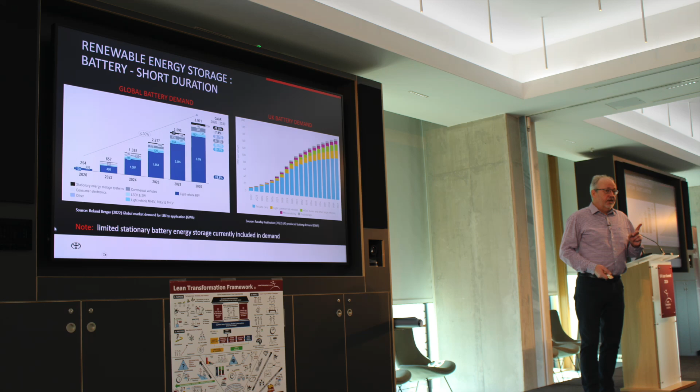So I'm Jon Hunt, and I'd like to thank you very much for the opportunity to come and speak to you all today. As was explained, I work for Toyota. I'm probably what you'd call a veteran of Toyota, I've managed to stay there some 30 years, and in that time I've seen quite a lot. I work on the fluffy side, in sales and marketing, unlike my colleagues who make the stuff. But guess what? You need us to sell that stuff. So it's about collaboration and cooperation.

I'm going to give you a bit of background to what I've learned and what I've seen in terms of lean product problem solving over those years. A little bit different from the academic things we might have heard today, and perhaps some resonant things about what we're all experiencing in environment and other areas.

So here we are, we're problem solvers, aren't we? We're trying to get to that silver bullet. I'm perhaps a bit overawed by the people in the room, the things people have done, what we've learned about how they've managed to achieve and progress things. This is a room full of practitioners of problem solving. And that's one of the innate human things we all have, the very unique thing that humans have in the animal kingdom. We can think of things in the future, modify the environment we're in, and take action to address that.

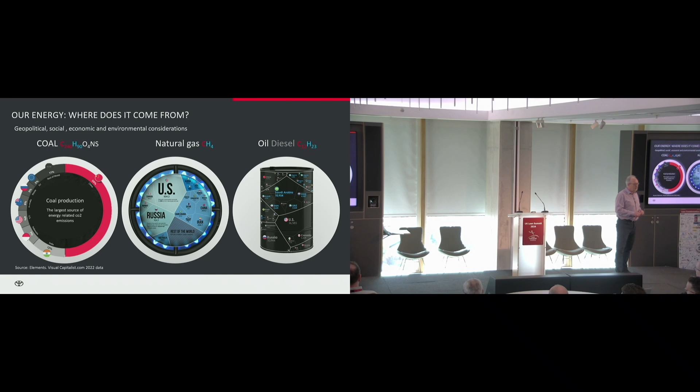The problem, of course, if you have a little closer look at that chemical formula, is that the energy that we use is all bound up with a lot of polluting, toxic, dangerous, and altogether unpleasant other molecules and elements. The carbon that causes the issues that we have. So this is a huge issue.

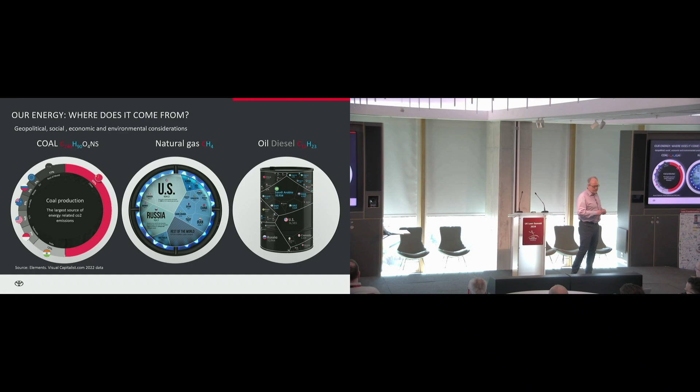So how do we overcome it? Well, it's not going to be easy, because when we look at energy, over 70% of the energy that we use on Earth today is based around those fossil fuels. So weaning ourselves off it is going to be extremely difficult. So we have to take different measures in order to get new energy, or somehow clean up this energy, get rid of some of that pollutant that's in our energy that we currently take for granted.

And again, this is fantastic, because our hydrogen-powered star provides us with the opportunity to take energy and turn it into something which is clean and completely renewable. Because, of course, the sun creates our weather patterns. Our weather patterns produce wind, and that, in fact, through its effect of warming the sea, creates our currents. And those currents provide us with the power that we can also harness as well.

And it's inexhaustible. There's more energy lands on Earth every day to run the Earth for more than a year. The problem, of course, is this energy tends to be in places which are remote and difficult to get to. So the best wind is in the middle of the sea, the top of a mountain. The best solar perhaps in the middle of the desert, far, far from the places of consumption.

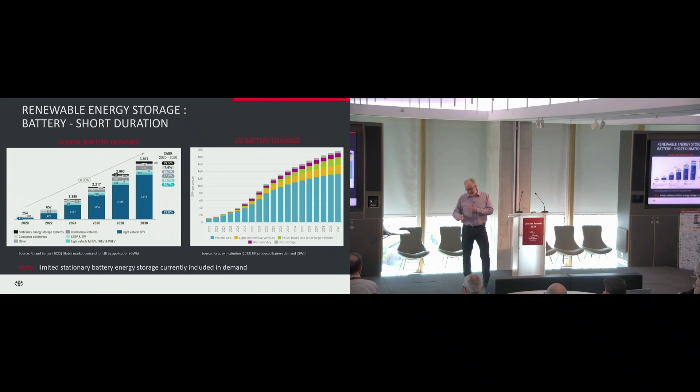What they say, Benchmark Mineral Intelligence, who produces some of the world's best insight into materials for batteries and raw materials, is that what we require in order to fulfill those battery requirements purely for transport is about $360 billion and about 360 new mines.

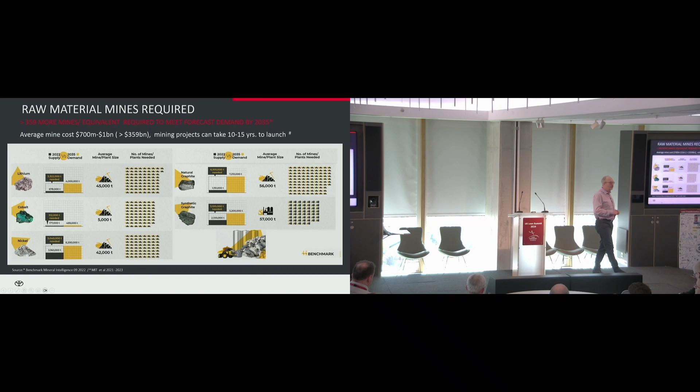However, they also point out that if you were to know where these materials were and you were able to start your mine, dig it up, and go through your processes, it will take between 10 and 15 years. We're in 2024 now, and by 2035, when the UK and many other countries will ban combustion vehicles, we're expected to have produced that many batteries.

There's a bit of a gap in terms of where you think the production of batteries may be. And that's actually understood. So despite all the things that are talked about, it's very well understood. The other question we've got to consider is where and how battery production is done, who controls it, and will it be available to us all.

These tables really just show you the current situation. This is battery production, this graph here. Draw your attention to the red block, this is battery production in China. Great, China produces a lot of batteries. They have a lot of demand themselves. Are those batteries really going to be made available at a price that's achievable and affordable for the rest of us to do the things that we want?

We don't know yet. If you look at the far side, this is actually looking at the material production side, and who controls what - the minerals and also the production capabilities. And China dominates it entirely.

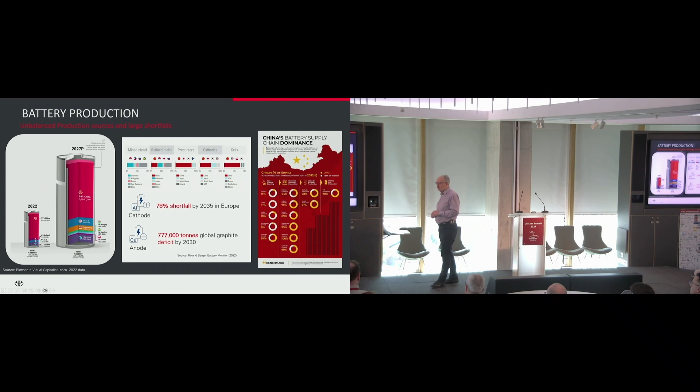When we look at all the materials and minerals, it's already identified that for Europe alone, we've got, by 2035, a 78% shortfall in the cathode materials. We've got 777,000 tonnes of graphite shortfall by 2030 globally. So there's a huge gap in terms of raw materials and the batteries we apparently require.

When we look at costs, we should understand how costs are made up. Over 50% of the cost of a battery is raw materials. If you are rushing to get those raw materials and they're in short supply, it's unlikely the price is going to go down. So the only place you can play around with in terms of cost is the manufacturing process, and perhaps by making your processes very lean you can reduce costs somewhat, but there isn't an awful lot of fat in the system to take out.

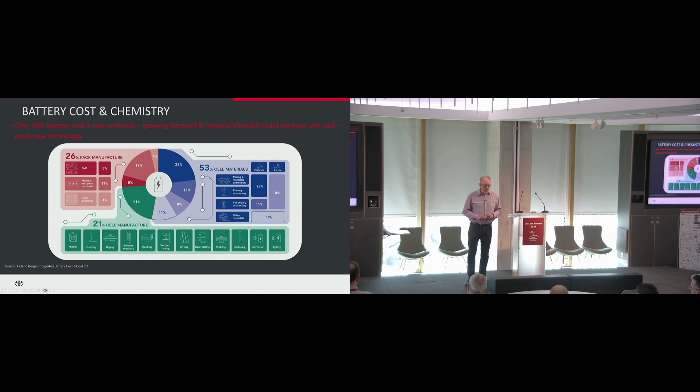So how might you address it? Well, there have been people thinking about these problems for a very long time. In 1870, this gentleman, Jules Verne, had a thought or two. I believe that water will one day be employed as fuel, that hydrogen and oxygen, which constitute it, used singly or together, will furnish an inexhaustible source of heat and light, of an intensity of which coal is not capable.

Now, he had no idea how this was going to happen, and despite my comment that nobody knows the future, people do have insight and can give you some direction. And so here we are in 2024 thinking about what we could do with hydrogen. In fact, it's not just started now, it's been going on for a very long time.

But in terms of hydrogen itself, you've got to understand a little bit about the chemistry and how you can extract hydrogen and how you can use it. Now, one thing you can do with hydrogen is remove the impurities from the fossil fuels you've got at source - carbon capture, use and storage. These are the things we hear about now, technologies which are possible. But the ideal situation, frankly, is to use water, because water is H2O - it's got a large amount of hydrogen and it's got oxygen in it.

If you put energy into water, as many of us will have done in chemistry labs in the past, you can split that hydrogen and oxygen apart. So you've got two different parts of that which you can use in different ways. And the principle is really quite fascinating, because when you use hydrogen, the only thing you produce is water.

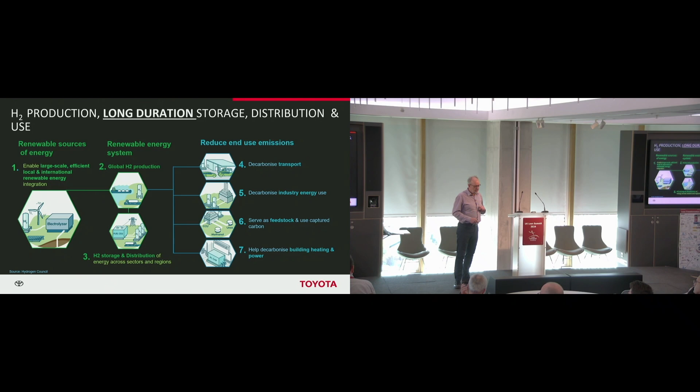Toyota, like many companies, is a company of innovation — in fact, founded on innovation and problem solving. And it recognises the problem of sustainability, because just like all of us, if we destroy the environment we're in, then there's no future for anything. It's quite a profound thought.

As a business, we've always had different environmental plans. Those plans have accelerated and developed over time, but the 2015 plan set out our plan to 2050. And that plan talked about a couple of things. The key thing, I think, is that we realised that something called net zero is pretty meaningless. What does net mean? What does net really mean? You can only measure something down to zero. So let's say 0 — that should be our target, 0. That makes a lot more sense.

Once you can get to 0, or alongside your process of getting to 0, you can do something better — you can become net positive, I think is a reasonable assessment. So the water that goes into your production processes can be cleaner when it comes out. The air that goes into your vehicle or other process can be cleaner when it comes out. The raw materials you use can be reduced as you go through your processes. So you can become a net positive contributor.

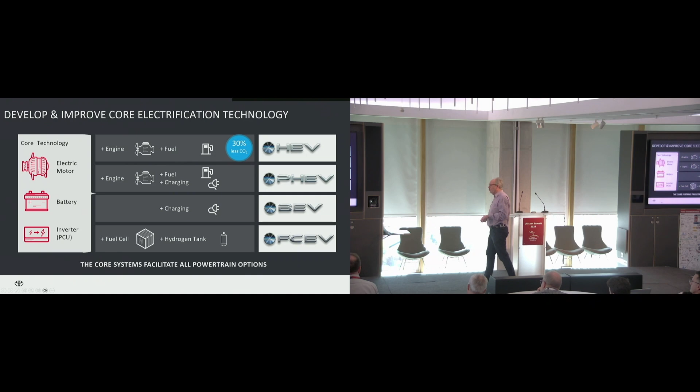With a battery electric vehicle, you're taking all your energy produced elsewhere, with its emissions elsewhere, and you're driving zero emission all the time. A fuel cell electric vehicle is actually a hybrid vehicle as well, and it works in the same way. It has its energy stored on board as hydrogen, converts it into electricity, and gives you drive.

So these are different ways you can electrify vehicles. There is another thought to consider though: the total resource content we touched on before. You've only got a limited amount of resources, so how do you use those resources in the most efficient, best way?

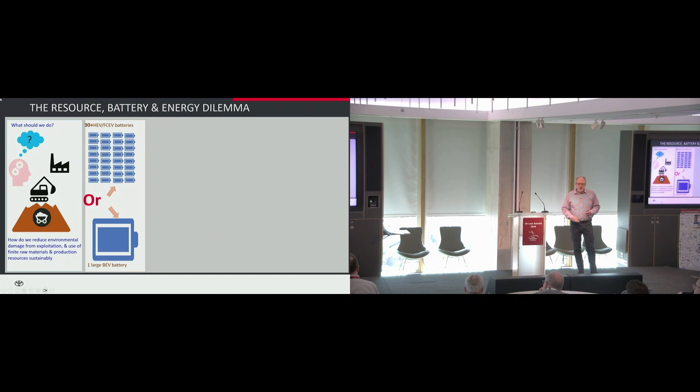It was mentioned the other day in terms of a simple mechanic - but batteries are batteries. Pretty fundamentally, I can make one large battery or many small batteries with the same amount of material. It makes a lot of sense to make many small batteries, because with those small batteries you can put them into different types of products. Most of us park our cars up most of the time, so making one big battery for one person solves one person's problem, but why don't we spread those batteries and give people the opportunity to do many more things with that same limited battery resource?

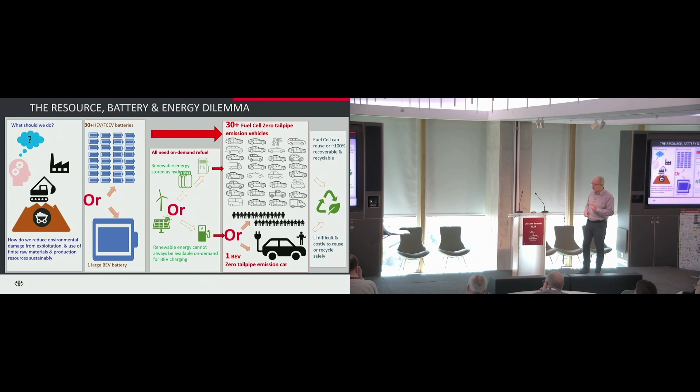You've got to think about the energy - whatever energy you use, whether it's petrol, diesel, gas, hydrogen, or electricity, you need that energy on demand. It's got to be delivered to the vehicle as and when you need it. Using stored energy in hydrogen allows you to do this both for battery electric vehicles and fuel cell vehicles. And when it comes to renewability and recyclability, batteries are extremely difficult to recycle.

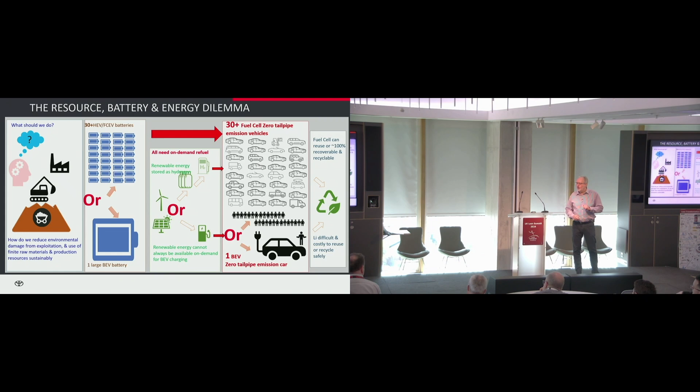We should try and avoid that as much as possible, and look at other alternatives. Fuel cells are almost 100% recyclable and recoverable. So from a Toyota perspective, the view is multi-pathway - just as in nature, a diverse range of products to satisfy different needs at different times, and transition along with it. And the fact is, unless you have carbon neutral fuels, you do not have carbon neutral transport, whether it's a battery electric vehicle, a fuel cell vehicle, or anything else at all.

The roadmap for Toyota has not changed. This has always been about talking about different types of fuels and different products for different requirements, because customers decide what they need, and you need to satisfy it in the most sustainable way.

So a fuel cell, very briefly with no chemistry - this is a fuel cell, this comes out of our cars. In our cars we've got 330 of these, and in very simple terms, this is like a sieve. On one side you have hydrogen, and the other side you have oxygen.

What happens in here is that the protons in the hydrogen, which is the simplest element - one proton, one electron - are forced through this fuel cell onto the other side, and then the electrons are released. The electrons want to join up with the hydrogen protons on the other side, because oxygen from the air is attracting them. Hydrogen doesn't like to be on its own, it likes to join up with its buddy oxygen and create water, H2O. That simple process can carry on indefinitely, and you can put these systems into all sorts of products.

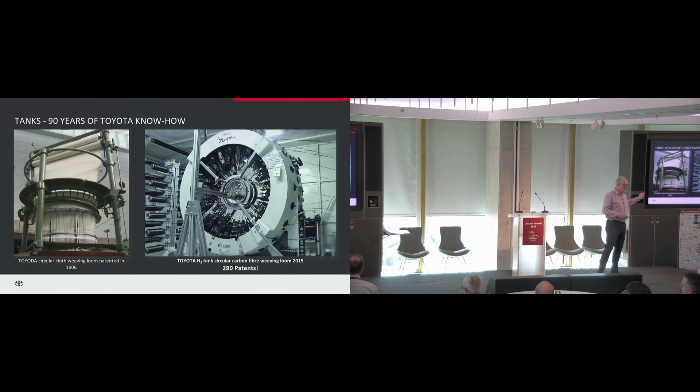This is actually a very interesting historical relationship, because in 1906, Sakichi Toyoda developed the circular loom, and the circular loom was a very fine loom - it produced great cloth. But that same technology could be used in our carbon fibre weaving looms, and so from that development, we were able to develop the carbon fibre tanks.

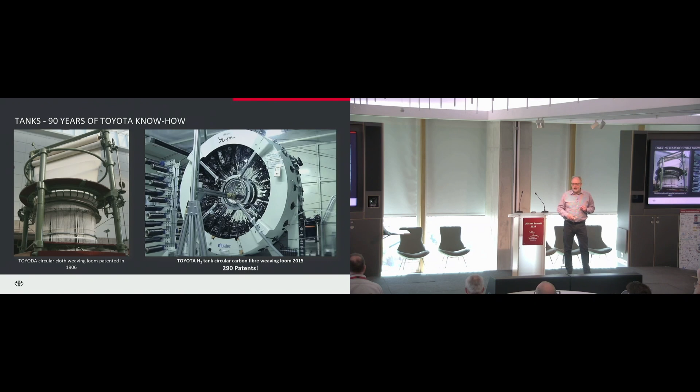Because that hydrogen has a lot of energy in it, you want them to be safe, and you want to be able to carry a lot of hydrogen. And this is our tank.

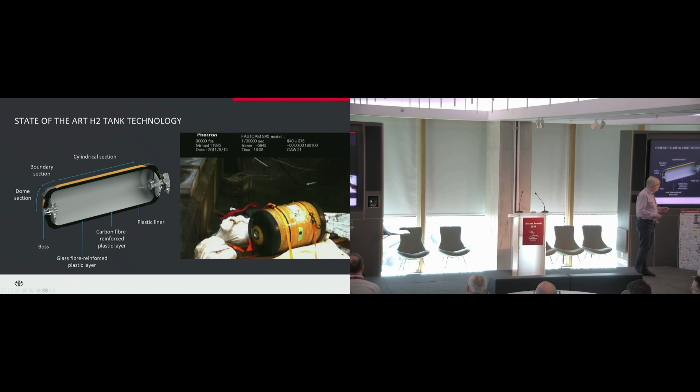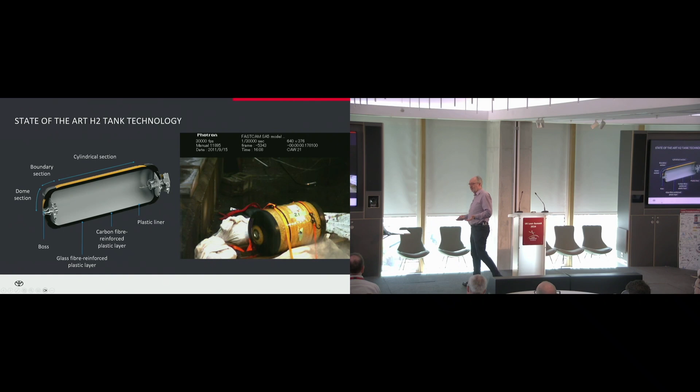Often I'm asked, what happens when that hydrogen leaks? What if it gets a hole in the tank? Well, I'll tell you, it's very difficult to put a hole in the tank. But one way you can is shoot it with an armour-piercing bullet. If you look at the little video at the side, you'll see what happens. Bullet goes in, gas comes out. No drama, no explosion, no issue. Of course, it's got energy in it, but that will dissipate extremely quickly. So it won't explode. It isn't a problem.

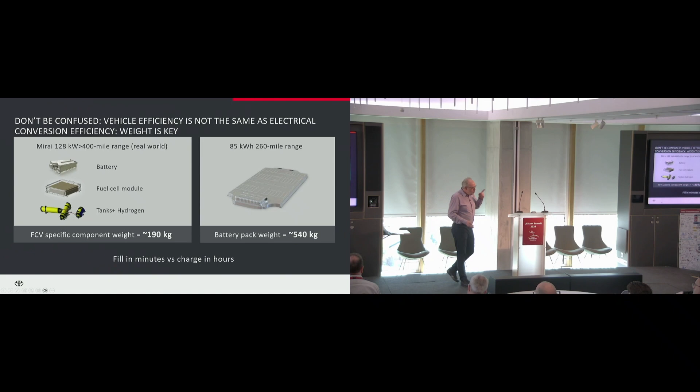Another question that's often asked is about systems and systems efficiency. Of course, to produce hydrogen you need energy. If you've got excess energy, then okay, you're using spare energy, it's not a problem. But don't be confused—vehicle efficiency is not the same as electrical conversion efficiency. Energy efficiency in vehicles is about weight, and weight in fuel cell vehicles is far, far less than a battery.

In the case of our fuel cell systems, same components with the additional fuel cell equipment, it's around 200 kilos. A battery, to do that same performance, is over 500 kilos—500 kilos of dead weight carrying around. That's muda, that's waste. That's not what you want in your vehicle at all.

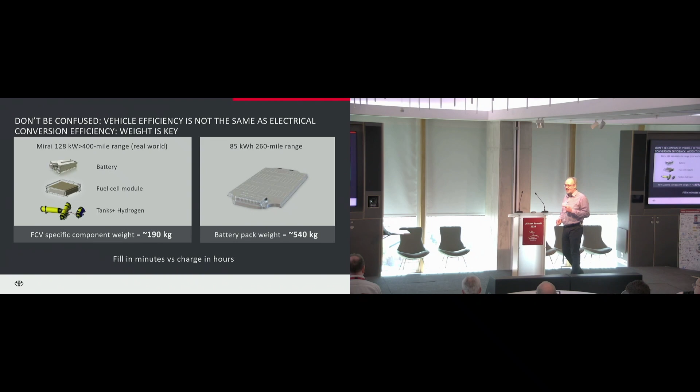So that's what drove Toyota to develop the first fuel cell vehicle. This was launched in 2015. I was fortunate to sell, in fact, the first car outside Japan here in the UK. And we followed that up with the second generation car, much more contemporary, longer range, higher performance.

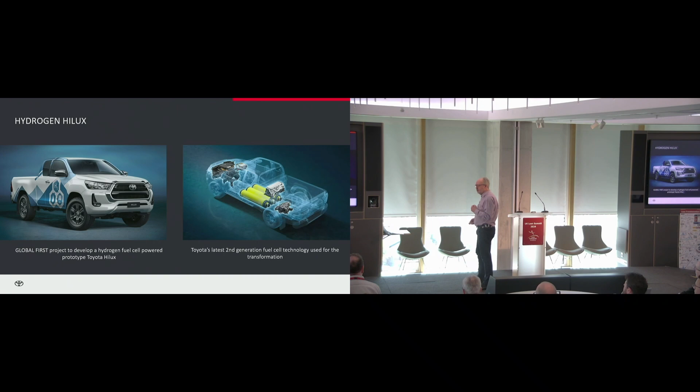We've just completed a project in Burnaston, our production plant in Derby, converting the pickup—very difficult to decarbonise pickups because of the job that they do—using exactly the same fuel cell powertrain system as we have in the second generation Mirai. Our aim is to bring that car to market if there's demand, because it's customers that actually drive what you will produce.

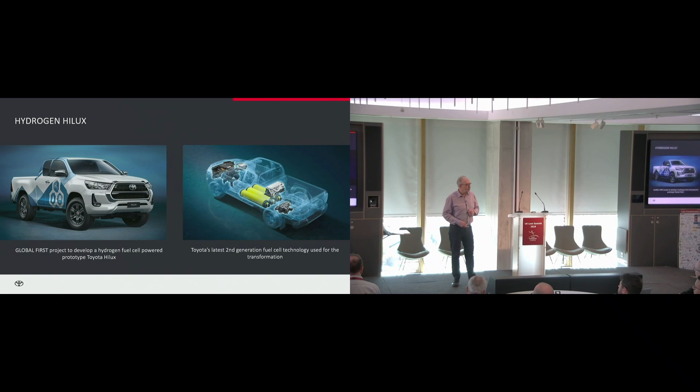We're not stopping there, because a fuel cell simply generates electricity. So anywhere you need power, you can do different things. Our systems are already being put into rail applications, maritime applications, stationary generators. I have one up in Derby which I'm using from our stored hydrogen energy to charge electric cars. So this is something we can do across the piece.

So over these decades, we've been producing large amounts of vehicles, around 11.5 million a year last year. There are around 300 million Toyota vehicles on the road today. We have a lot of experience, a lot of understanding that we need to satisfy a lot of different demands around the world. So that brings us full circle.

As we know, nobody can predict the future. It's a little bit of a lottery. If it weren't, we'd all have won that lottery and we probably wouldn't be here today. But it takes people with insight to tackle those problems and think about the processes in which you can moderate and control that uncertainty as we go forward.